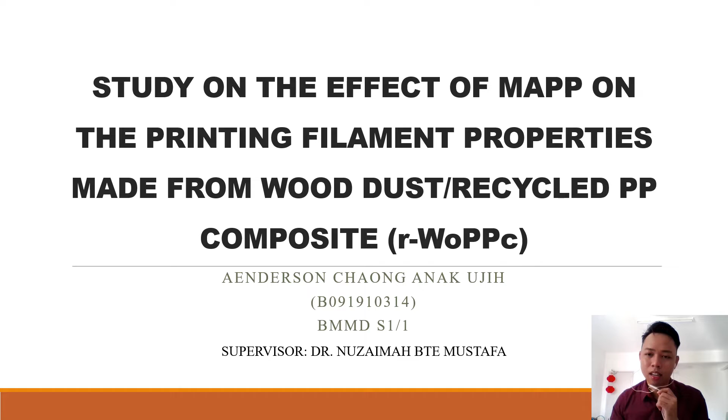For the introduction, the first point is the Malaysian population is increasing at a rapid rate, reaching 32.6 million in 2019. It is estimated the waste will be 38,200 tons per day. The source is from the New Straits Times in 2019. And the World Wide Fund also showed that in Asia annual per capita plastic use, Malaysia is in the second rank.

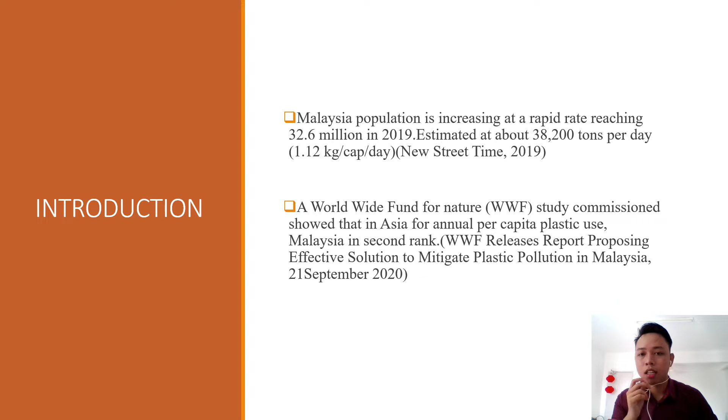As we know, plastic waste has become an issue right now in 2020. Due to this issue, the problem statement will be wood dust. On the other hand, it has low energy use and is renewable and biodegradable. And plastic is also widely used, low cost, lightweight, with texture, durability, and ease of use. These two materials each have their own abilities, but to make special material properties, the wood plastic will have both properties.

So the development of wood plastic is of great interest in a variety of industries, including construction, automotive, and others. Wood plastic has high specific strength, modulus, as well as corrosion resistance when compared to synthetic fibre. For this study, I will try to mix two materials, the wood dust and the plastic.

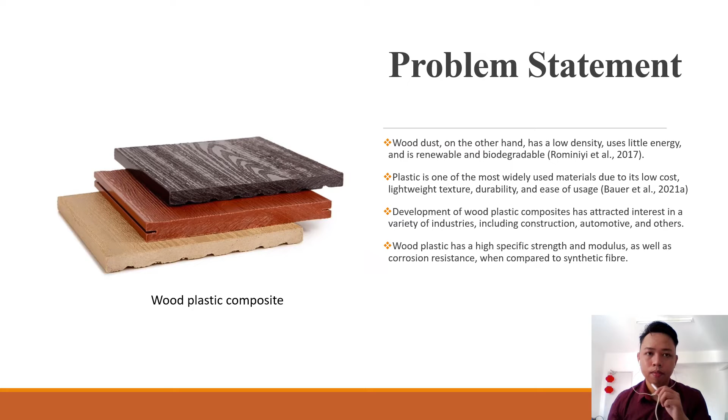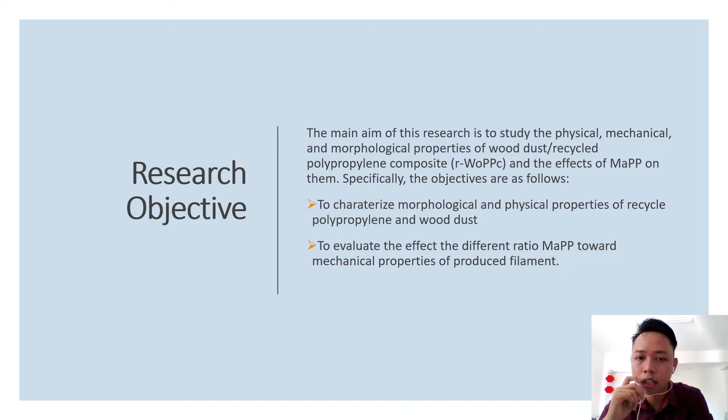The main research objective is to study the physical, mechanical, and morphological properties of wood dust and polypropylene composites. The first objective is to characterize the morphological and physical properties of recycled polypropylene and wood dust. My second objective is to evaluate the effect of the ratio of MAPP on the mechanical properties of the produced filament. So these are the two objectives that I'm trying to achieve in this study.

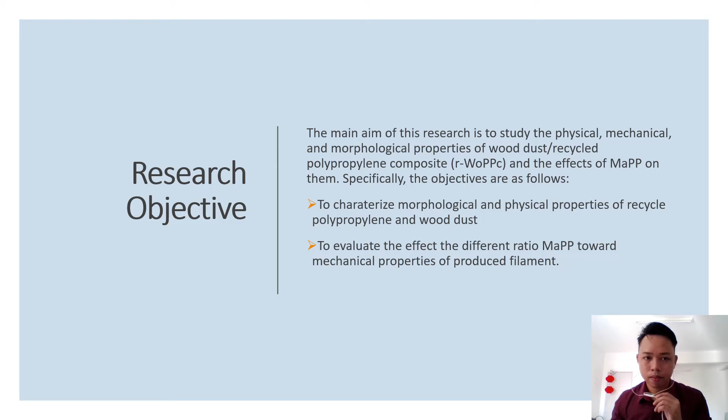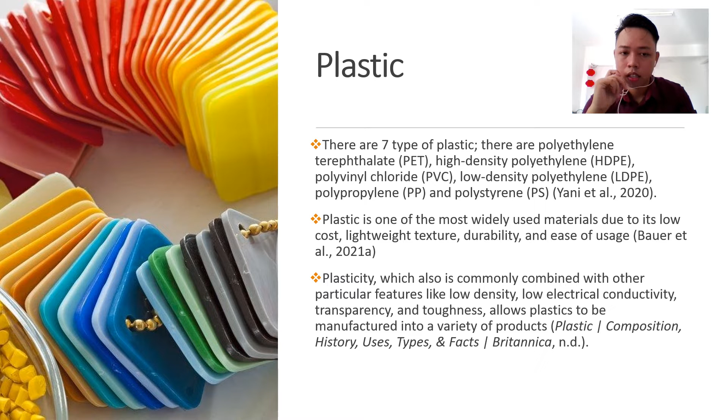Plastics. For this study, I will be using a plastic. There are 7 types of plastic that I figured out. Plastic is most widely used due to its low cost, lightweight, texture, durability, and ease of use, as I mentioned before. Plasticity is commonly combined with other features like low density, low electrical conductivity, transparency and toughness, allowing plastic to be manufactured into a variety of products. So in this study, I will try to select a plastic that is suitable for this study.

Wood dust. Overall, wood dust is a term for cheap wood as a manufacturing waste and can be categorized by great variation depending on the type or species of wood being machined or type of wood material, as well as their shape and size, which differ from particles produced by different methods or machining specifications. It is also indicated as a high level of wood chips from harvest activity. The majority of forest trash, particularly wood dust, wasn't used and utilized properly.

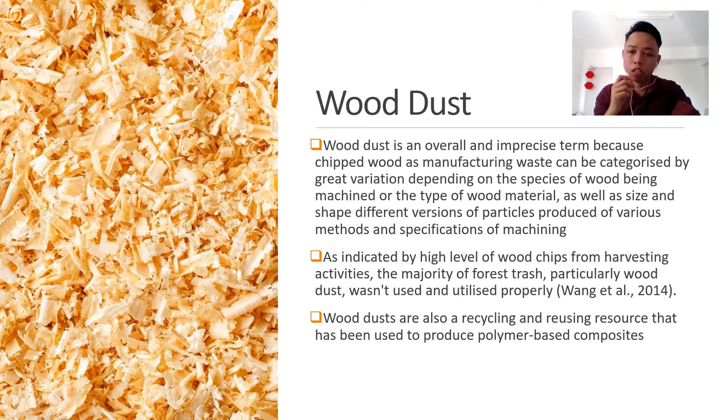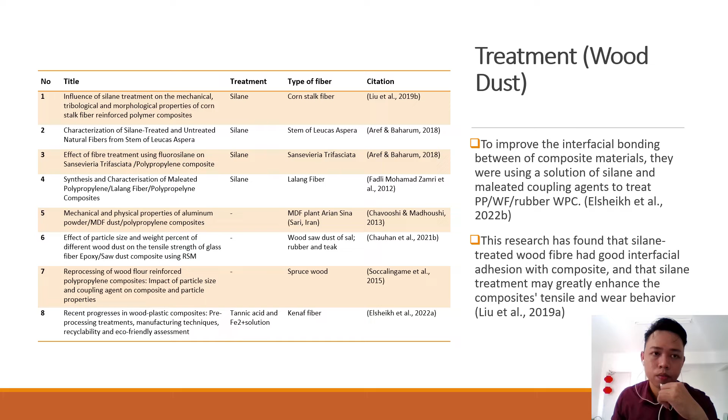For my study, we'll use silane as a treatment for the wood. Maleate. Maleate coupling agents are frequently used to reinforce composites using filler and fiber reinforcement. In this study, I will be using this maleate, and the type I use is MAPP. A maleate coupling agent with a correct balance of maleic anhydride and molecular mass can achieve the best performance in fiber composites according to actual properties information.

In this study, I will try to reach the best performance using three types of mass. There are 1%, 3%, and 5% of maleate. The maleate I use is maleated polypropylene (MAPP). MAPP also can be used to improve fiber and filler compatibility.

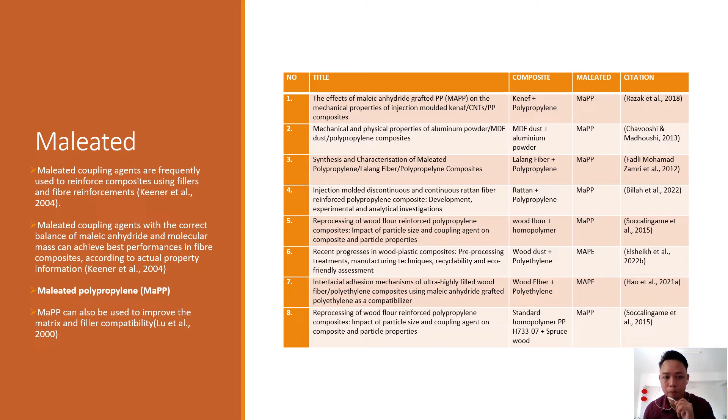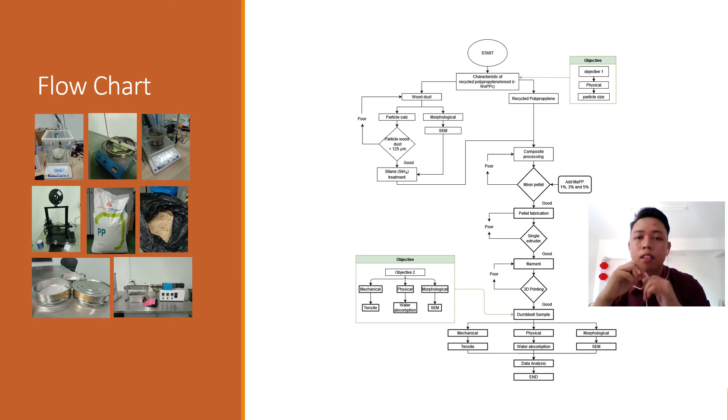To conduct this study, I will prepare some material. There will be a recycled PP that is prepared by the supplier in pellet condition, and also wood dust collected from a manufacturing factory, and we need to reduce the particle size of the dust using a sieve process into 125 micrometers.

Then for preparation of silane, we need to make a solution of silane that consists of 10 ml of silane, 49 ml of distilled water, and 441 milliliters of methanol. This silane will be used to treat the wood dust. The wood dust will soak in the silane solution for 3 hours. After the 3 hours, it will be dried using an oven at 80 degrees Celsius. After it's dry, it's ready to mix with PP with different ratios of MAPP.

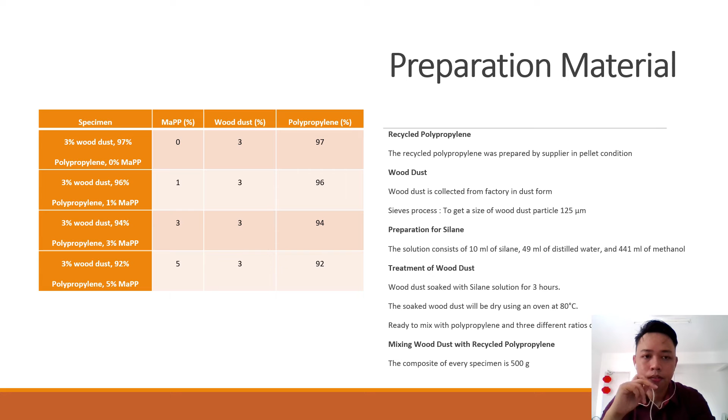Every composite and every specimen will have 500 grams of composite. The table shows how I am going to mix the material based on their percentage with 500 grams per composite.

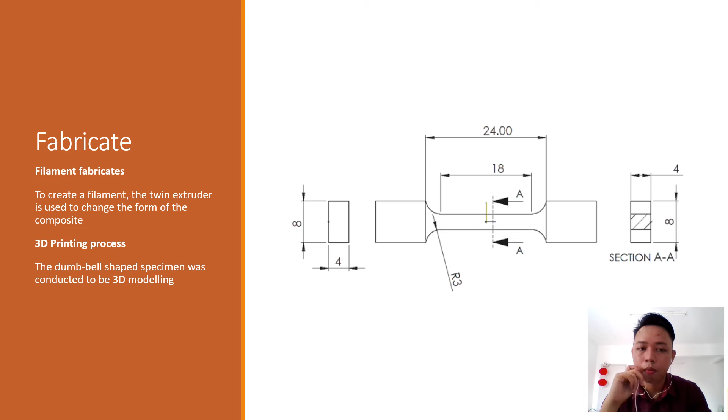After the wood is mixed with PP with different ratios of MAPP, then I will fabricate it into filament using a twin extruder so that we can change the form of the pellet. Then after I get the filament, I will print it out using 3D printing into a dumbbell-shaped specimen. The figure shows an example of the dumbbell shape that I'm going to fabricate.

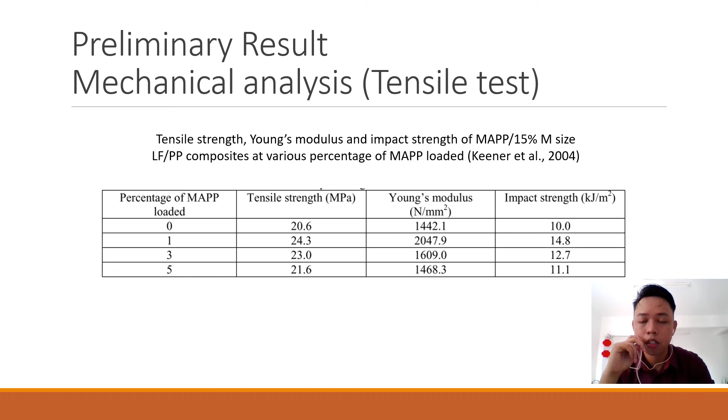Preliminary results. For these results that I predict based on a research paper, they also used different percentages of MAPP loaded. There were 0%, 1%, 3%, and 5%. Based on the research using lalang fiber and PP composite with MAPP loaded, they show 1% has a high tensile strength of 24.3 megapascal. This shows that the best percentage of MAPP that can be loaded into this type of composite is 1%.

In this study I will also have a physical analysis based on a water absorption test. The tendency of the composite to absorb is tested. So in this study, due to high tensile strength, I assume that 1% MAPP will have less absorption of water because the void between particles is low and it also has high density.

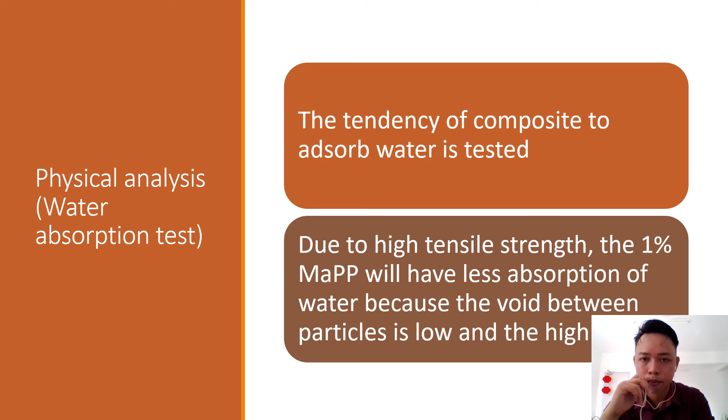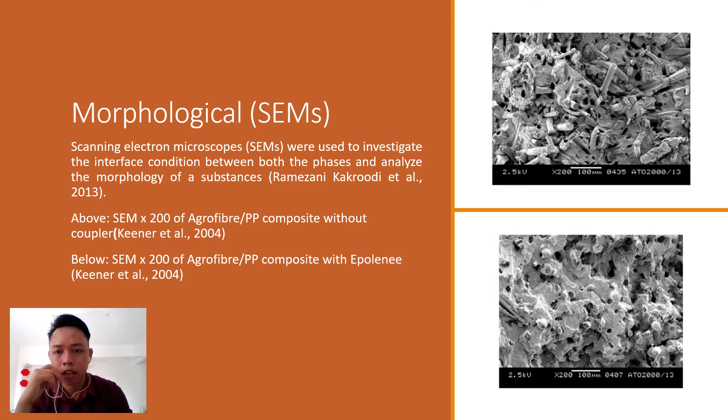Thank you for your attention. So this is my study on the properties of a composite of wood dust combined with PP, and also adding MAPP ratios of 1%, 3%, and 5%, and there will be 0% to see the different properties based on mechanical, physical, and morphological analysis. So, thank you for your attention, everyone.